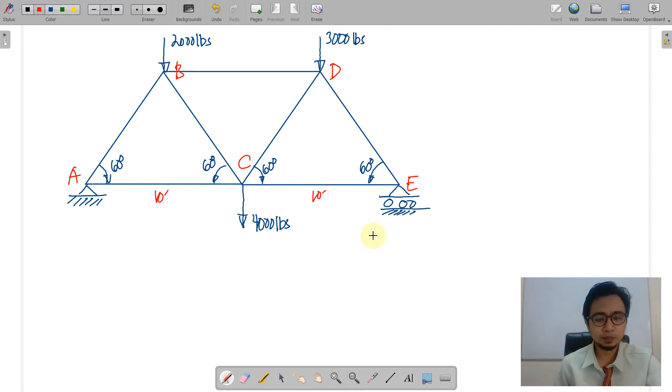Of course, the very first step is to determine the corresponding support reactions, particularly on point A and at point E. So working with the reactions, let us label all the support reactions. Of course, at point A, we have here a horizontal and vertical, but obviously horizontal has no value since there cannot find any horizontal force there.

And let us assume that we have here an upward RA and an upward RE on this side. So again, we solve for the reaction by summation moments and then check it by summation forces vertical. So by summation moments at A, we have

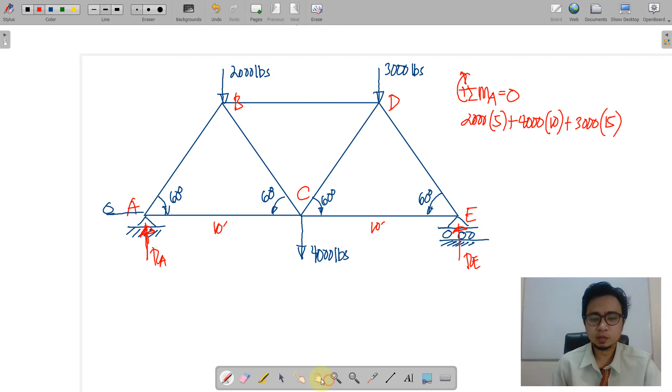clockwise 2000 times moment arm of 5 plus 4000 times 10 plus 3000 times 15, okay, minus RE times 20 is equal 0. So we get RE is equal to 4,750 pounds. So for the other reaction, we take moments at E and equate it to 0.

So we have a counterclockwise 3,000 times 5 minus 4,000 times 10 plus a clockwise RA times 10 less counterclockwise 2000 times 15 is equal to 0. So I think we should have a distance for RA equivalent to 20 so that RA would be equal to 4,250 pounds. So with this, we are going to check our reaction before proceeding to the analysis proper.

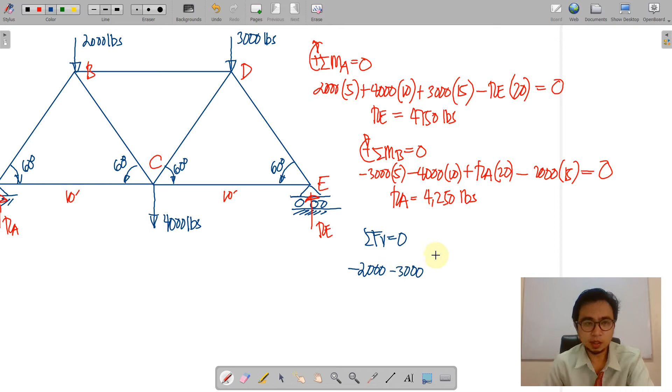So we can do that by summing up forces vertical. We have downwards negative 2000 less 3000, another downwards negative 4000, then the upwards reaction 4750 and 4250, that shall be equal to 0. So if we're going to compute that, it is really equal to 0. Okay, so now that we are assured of our reaction, we can now proceed to our analysis.

So this is done by joint method for the meantime. So of course, we have introduced how to do that. We go joint per joint, but we do not have to illustrate an x and y axis for each of the joints. So we'll just utilize horizontal, vertical, and diagonal forces. So remember that the diagonal forces should have their components.

Okay, so the basic first step is to choose the joint where there are only two force members. So in this case, obviously, we have the edges as the simplest joint to work with. We have A and E. So starting at A, we have 4,250. So 4,250 is an upward force. So let us choose between AC and AB, where it will resist RA is equal to 4,250.

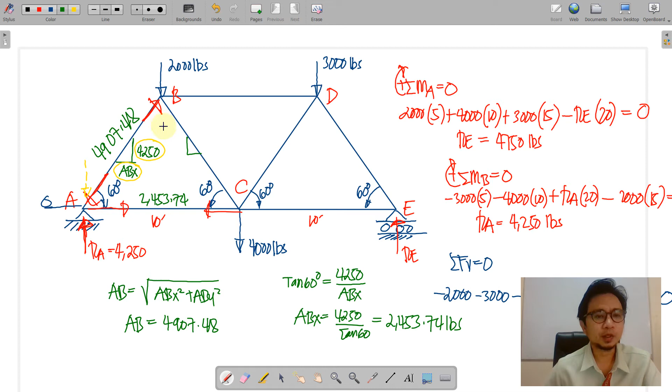Here it is. So rationally thinking, there will be an upward 4,250 and a downward 2,000 at joint B. And as a result, a vertical 2,250 upwards shall prevail. So if that prevails between 4,250 and 2,000 here, therefore, it will be needing a supplemental force downwards equivalent to 2,250. So here it is, the component of BC. So we indicate the direction at joint B. So it is going that direction, or actually that is tension, in order to adhere with a downward force 2,250.

So if we are going to review this, an upward 4,250, downward 2,000, downward 2,250, that will yield us to zero force under vertical loading. So our next concern now is the horizontal. First, we need to obtain BCX by function of, again, we are going to use tangent. Tangent 60 degrees is equal to 2,250 all over the unknown BCX. So therefore, BCX is 2,250 all over tangent of 60. And that is equivalent to

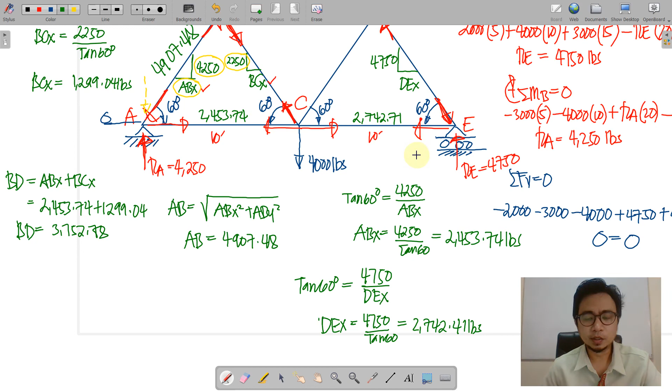So proceed to the horizontal at point E. Of course, we need to find DEX, and that could be found by tangent function. Tangent 60 degrees is equal to 4,750 all over DEX. That is 4,750 all over tangent 60. We have 2,742.41 pounds for DEX. And that will be also the value for CE. That is compression. So actually it's against the direction of DEX. That should be leftwards. So we will change that and place the value. Then we have now a balanced force on the x and y axis along joint E.

So by this, we can now solve for value of DE by Pythagorean theorem. We just have to square the y component and square the x component and then get the square root. So we have 5,484.83 as a force for member DE. So there is one more left, that is member CD. Similarly, we're going to place the force triangle. This time you can choose either the vertical or horizontal, since CD is the only force left.

So looking at the vertical forces, we have here an upward 2,250, a downward 4,000 pounds. Therefore, we should require an upward 1,750. So it follows that this force is in tension. Then we should obtain the horizontal component CDX by tangent function again. So we have 1010.36. So we are now complete on the forces. And then we should realize that we have a complete set along y and along x here.

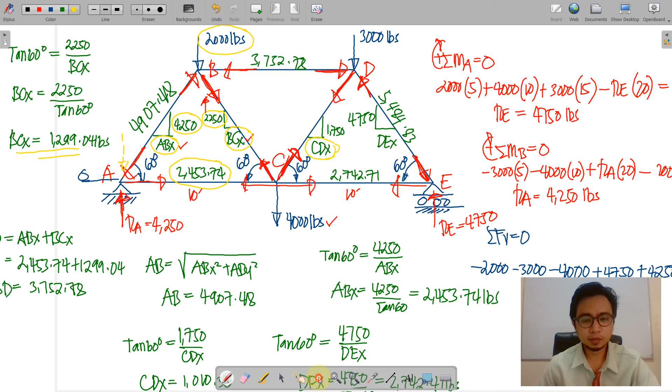And another leftwards BCX, which is 1299.04, plus CDX, which is 1010.36, plus another rightward force that is CE, equivalent to 2742.71. Summing all of those, we have equal to 0. So in short, there is a balance now between vertical and horizontal along joint C. So remember that joint C is the last joint that we have worked on, and CD yielded to certain CDX here, and then upon checking it yielded to 0 along X and along the Y direction. So therefore our analysis is correct in a way that we have balanced all of the joints.

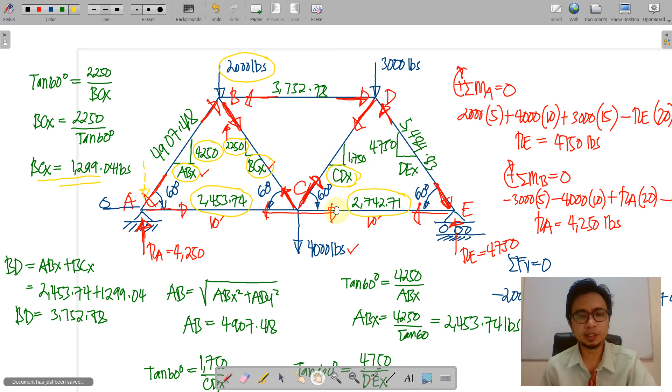So of course we wanted to compute for the force member of CD upon these components CDX and CDY. That is 2020.72 for CD, and then for BC we have to obtain this value by its components 2250 and BCX, and that is equivalent to 2598.06. So that is about our analysis for today.